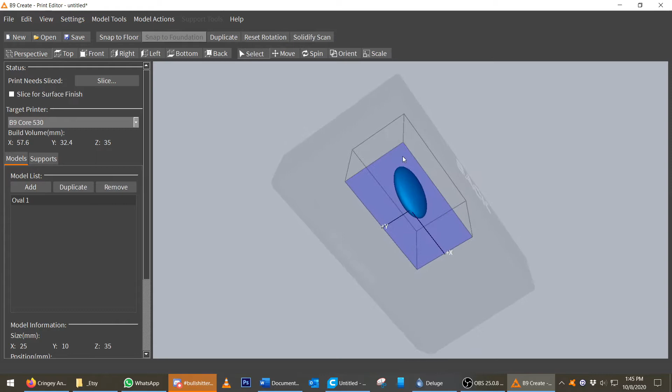It's also great because in B9, if I see that my supports in Asura had failed, I could come in here and add new supports on it.

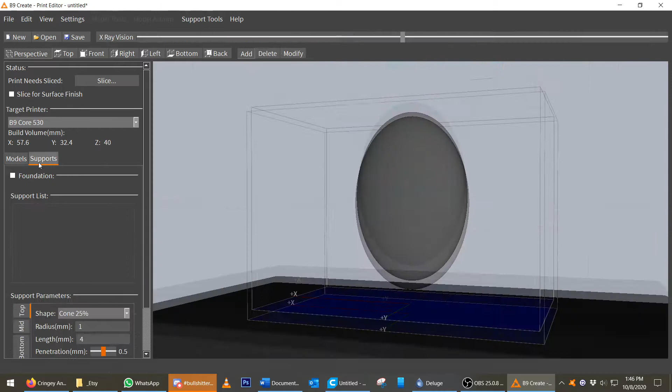Our support parameters have custom, tiny, light, medium, and heavy options. One of the great things about this is we could change the shape to a nice, large collection of various types. Defaults are fine, they work very well.

When I'm doing very tiny miniatures, there are a lot of tiny supports on there, and they succeed. Given that this is going to get its first print, I get my little white line. It's actually thinner than it was in Chitubox, which I'm more fond of with B9.

Woof! Hello, Chungus. That's a big boy.

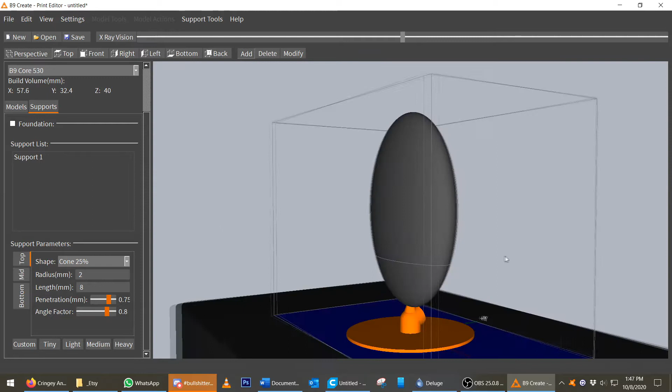Alright, let's modify this one. Select it, and make your modifications. I want that bottom to be smaller. There we go.

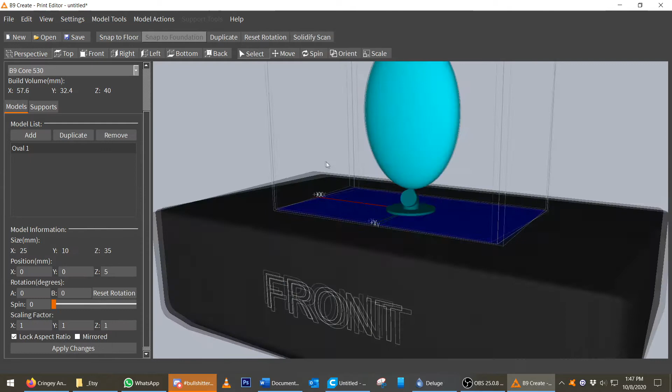I could change the thickness of the shaft, I could change the cone type, I could change all kinds of things, including making that cone look a little bit less terrible.

There we go. I know that Chitubox does this, I have not tested it in Asura, but it's a fun thing that I like to play around with if I need a little more distance on the support or a little more of whatever. It allows me to play at those numbers quickly, live.

No matter how many supports are on there, I could have 30, 40 supports on there and it'll work. Back to the support tree.

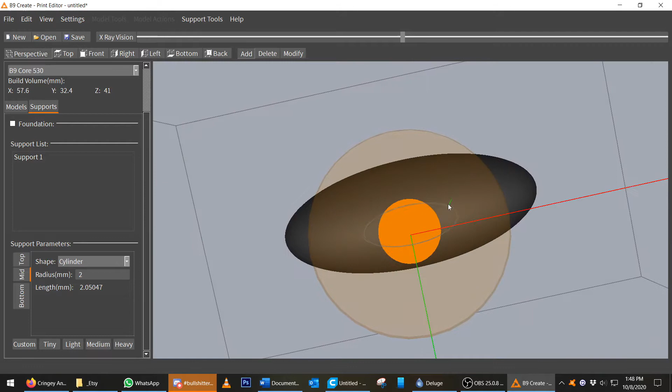So I'm going to go to medium supports, and I'm going to add one there and there. Cone looks nice and thick, and that's going to be a huge workhorse for our workload.

As I mentioned before, my tendency of minimalism on the support plane means that I have learned that I can get away with this.

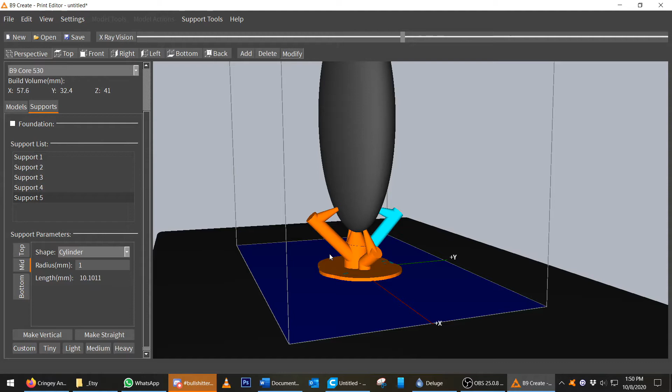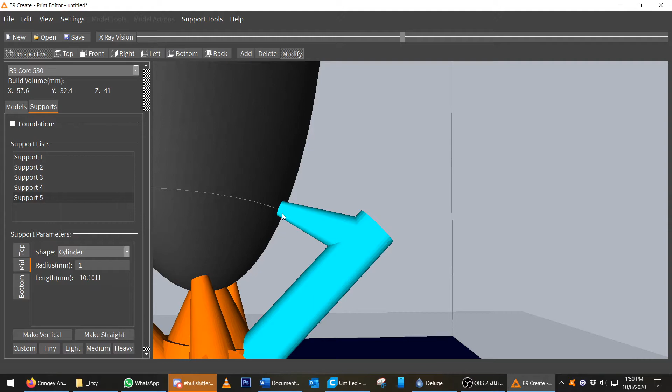However, there is one thing you want to keep a lookout for. Notice this right here: when the bottom of the contact point on the model is below the support end point, there is a potential of failure at the contact point.

So, though I am certain this will print just fine, that error gives me a little warning bell inside my head that says I probably need to add something a little bit lower, right in between, just to make certain that these succeed.

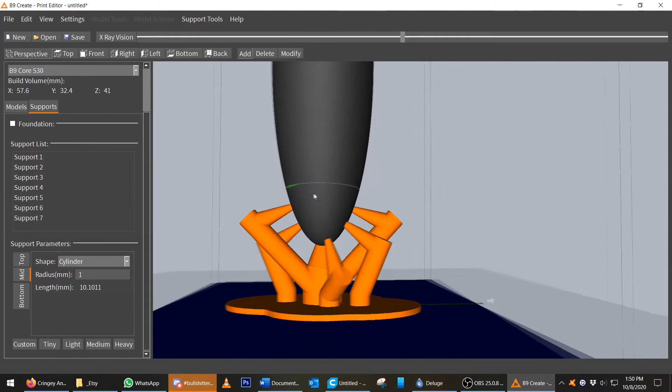There we go. Now that endpoint is definitely below, just like the rest of them. Go to modify, bring it in.

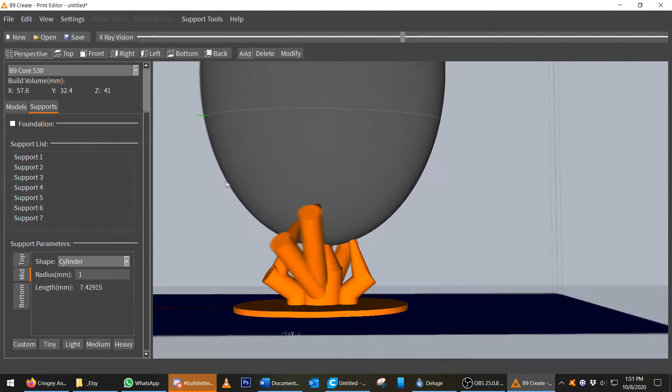And there's our art sculpture of supports. I could add a couple more in there to keep it symmetrical. Since there is no kill like overkill, let's go ahead and do it.

Doesn't that look like it would just succeed? You've got a nice tree on the bottom with minimal peel force.

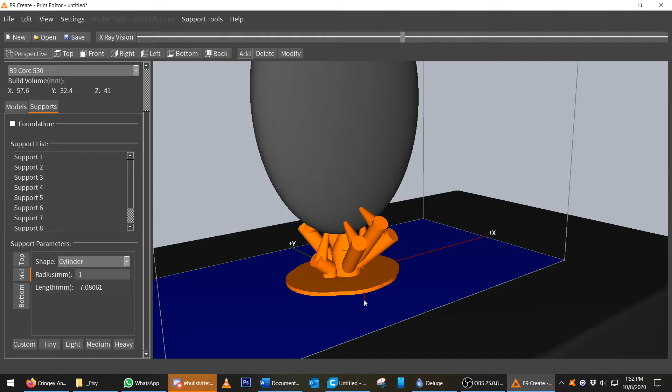It's a raft, technically. And once it gets past that raft, if it prints the raft just fine, you know the rest of it's going to succeed. I can actually get rid of that raft completely if I wanted to by adjusting the diameter, but I think this is fine and it should succeed without issue.

When you do a lot of supports, your raft gets bigger and bigger and bigger, and you can have fail points because the raft did not allow a release from the FEP. That is something to be cognizant of.

So raft minimalism is another aspect that you have to be cognizant of. Asura is bad about raft minimalism. It makes gargantuan rafts that cover the entire scope from one point to two points, and everything in between.

So that's why I like to play with B9. It allows me to minimalize the raft and to keep thinking about it and work it through the thought process. And it's taught me how to make supports.

Now this tree, that's going to be fun. This model is going to print, as I predict, with little to no problems. I think it's going to be great.

Okay, so that's done, as we can see. In case you're wondering, B9 Creator has a mod that you can import to create a Moai base, because this base is not sized for the Moai. It's a lot smaller. I could have models in here a lot larger than it, and it'll be just fine.

Again, that's another reason why I like to start in Meshmixer, because I know the dimensions and how and where it should be aligned.

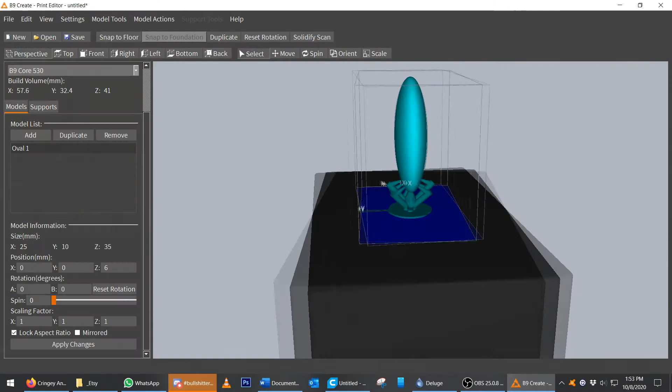With this done, let's export it. File, export. Supports, B9.

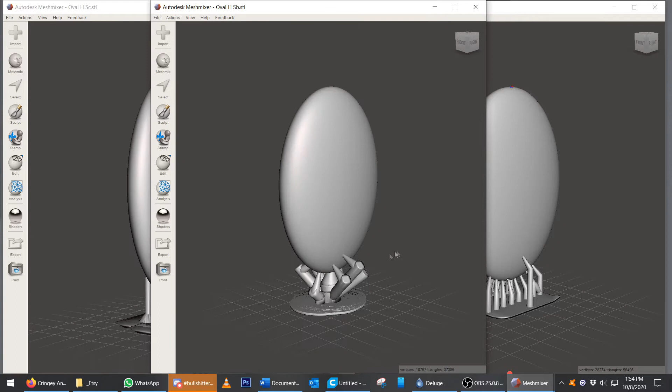Now, if I were to make a comment on this, it supports minimalism at its finest. Some funky tree-like growth of supports. And millipede legs.

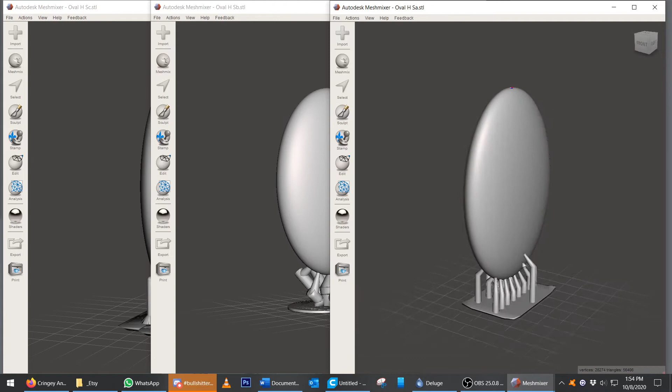Now, out of these, which one do you feel the most confident in printing? It's a mighty good question, isn't it? I'm pretty confident that all 3 of these will print. And it'll be a test, and that's a fun test to do.

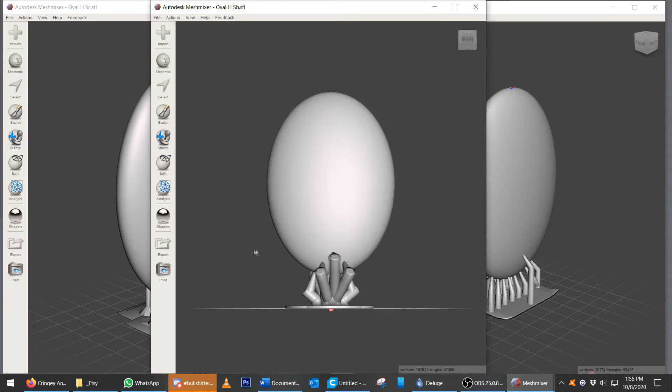But I still gotta say, me personally, I just love the B9 supports. There is just something about them that I like the most. Seconded by the Asura supports, because when you get those, a brainless, monolithic number of supports generated automatically, and you just go in and fine-tune them. I've done that a lot.

Chitubox on simple supports, or on simple models, Chitubox on complicated models? Between it and B9 Creator, it's kind of a toss-up for me.

However, for your workflow, you may find that Chitubox being a one-stop shop just for you may be all that you need, and that's all you ever need to worry about, and more power to you, go right ahead. Between the 3 of these programs, you should be able to generate supports without question, without fail, pick up the faults of one to improve them, and make your life much less problematic.

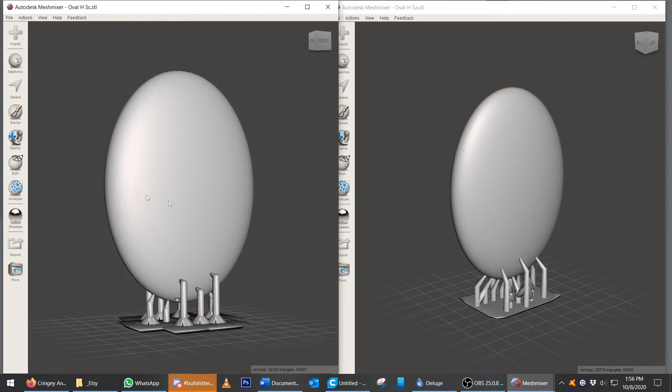So if I were to say, if I needed to generate an extra support in any of this, it's kind of a toss-up. I want to do it to both Asura and Chitubox. So I'm going to go back to B9 Create.

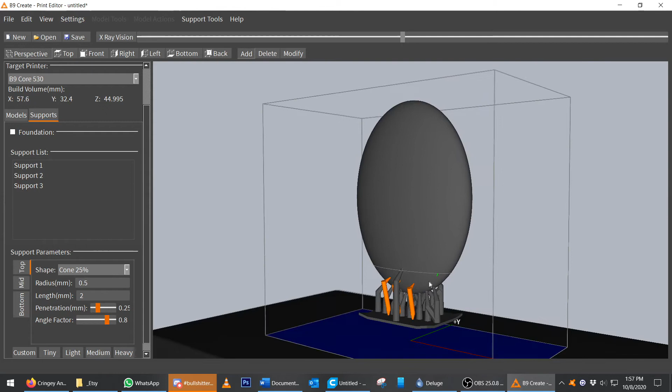Let's add our model. Asura first, because it is in alphabetical order. There it is. Beautiful blue. Let's go to the support tabs. Notice how it is raised a little bit. And I'm thinking a little light line right here, just to be cheeky. For some reason I think that'll help improve the quality of the print overall.

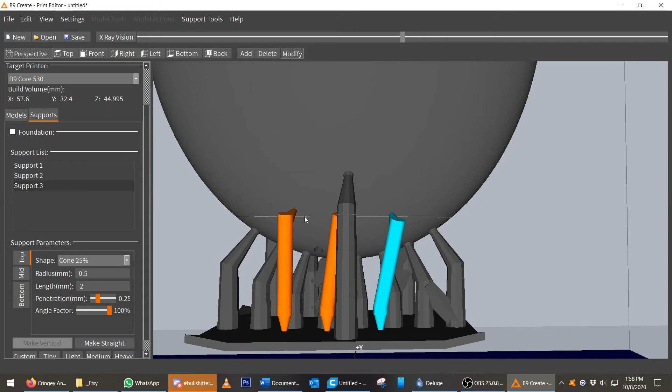Only one problem about moving the panning along on this one is it automatically adds a support when you do that. All right, let's modify these and clean them up a little bit. B9 allows you to modify, so I could just boop, boop, boop, add them, and boop, boop, boop, modify them. So much simpler in B9.

Okay, so here's a cute thing that you can do, is you can actually insist upon model collision on your supports. Just like that. In the same purpose, where you have those angled lines in the back here on the Asura model, you can force those intersections and collisions upon supports, improving the structural integrity and the rigidity of supports. That is why on the B9 Create, when I generated the supports, I started bringing everything in together and started having them all touch.

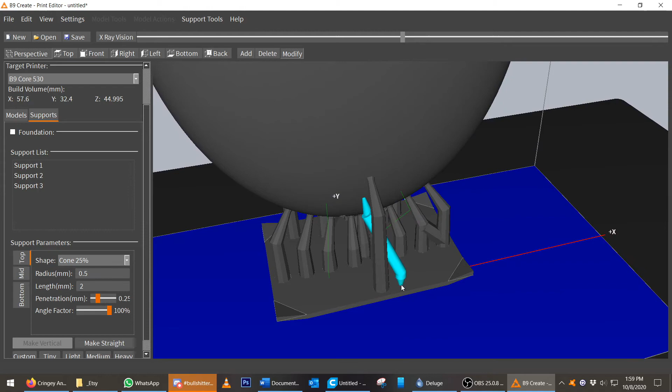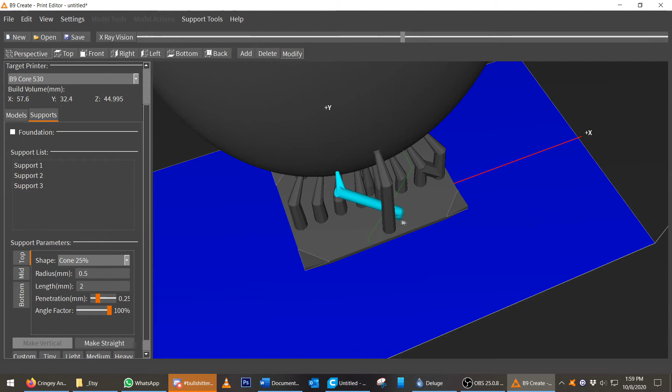It creates a stronger, unified base that has fewer problems down the road. So this boy right here, I can actually double up on him. Yeah, let's make him the thick boy. Look at that. And let's get cute, because we can. And let's make a cross beam right there. There we go.

This will also create a moment where if one of these 4 supports fail, there is a high chance by the time it gets to the intersection, the supports will recover themselves. When you're doing a lot of little supports, that is something to be absolutely cognizant of. And if you do this, you will see at the base a support failed. It goes up, hits the intersection, recuperates, model printed successfully.

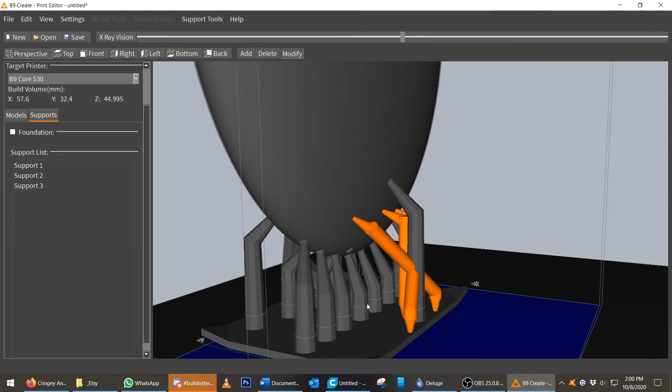You want that. So with this done, and in fact, I could take this and pull it out here. Yeah, look at that. Look at that bad boy. Sitting way out there. Way out there. Uh-oh, but that's a different problem.

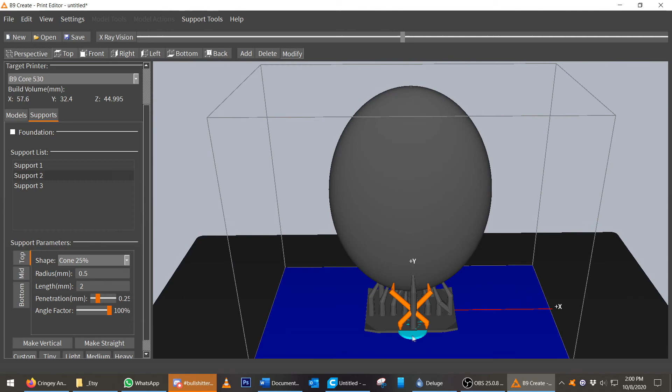Let's go back to models. Change that Z height to 0. Bam! Right back to the build plate. And now, modify, please. Thank you. There we go. Let's modify the bottom on that one for a radius of 0. There we go. That's the fun thing about B9, is I could do all kinds of things like that.